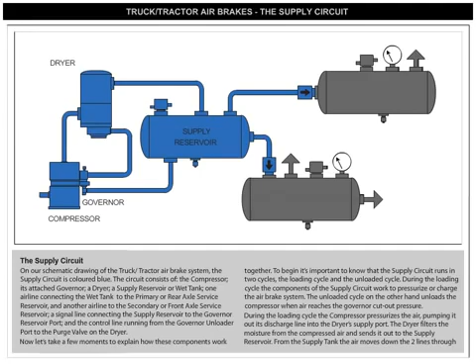It's important to know that the supply circuit runs in two cycles: the loading cycle and the unloading cycle. During the loading cycle, the components work to pressurize or charge the air brake system. The unloading cycle, on the other hand, unloads the compressor when air reaches the governor cutout pressure.

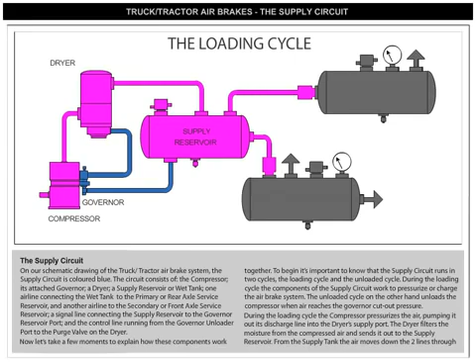During the loading cycle, the compressor pressurizes the air, pumping it out its discharge line into the dryer's supply port. The dryer filters the moisture from the compressed air and sends it out to the supply reservoir. From the supply tank, the air moves down the two lines through the one-way check valves and into the primary and secondary circuit reservoirs. As the compressor runs, it pushes more and more air through the dryer and into the supply, primary, and secondary reservoirs, loading the air pressure equally in all three, pressurizing the system.

The unloading cycle begins when the load in the supply reservoir reaches a predetermined cutout pressure, somewhere between 105 and 135 psi. When the load in the system reaches the cutout pressure, the air in the supply reservoir signal line pushes through the governor to the unloader valves, holding the compressor's intake valves open, stopping the system from charging and purging the air dryer of moisture.

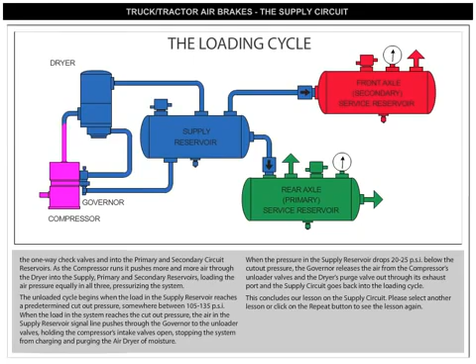When the pressure in the supply reservoir drops 20 to 25 psi below the cutout pressure, the governor releases the air from the compressor's unloader valves and the dryer's purge valve out through its exhaust port, and the supply circuit goes back into the loading cycle.

This concludes our lesson on the supply circuit.